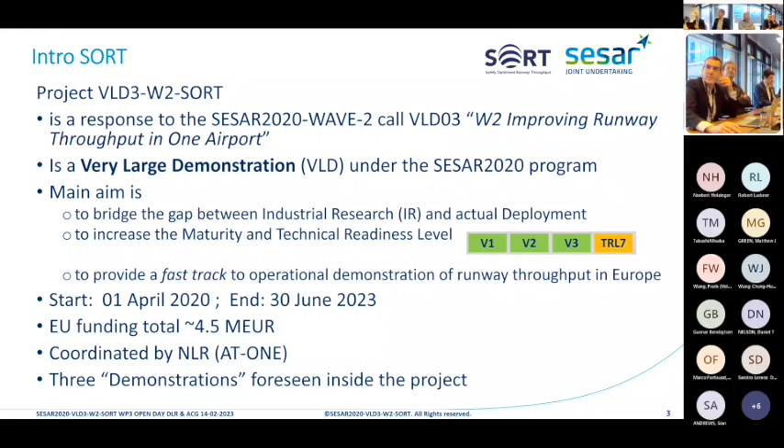So maybe if I can have the next slide, please. But before that, who are all inside the consortium? On the left side we see the kind of members. AT-One is a kind of partnership between Royal NLR and DLR as a research entity. NATMIG is the North European ATM industrial group, with many partners inside, amongst which SINTEF Norway is a member of this consortium. And COOPANS is a cooperation, a partnership of ANSPs — we're happy that Austro Control, also a member of COOPANS, is hosting this open day today for us, and also part of COOPANS in the project is LFV Sweden.

Of course, we know Eurocontrol, and they are part of this project as well, together with NATS of the UK, an air navigation service provider, who also has a linked third party coupled to their work, the company Leidos, who works on software implementation and product matters. And also another ANSP, Skyguide, is part of this project.

From the view of the SESAR European Airport Consortium, we have 3 airports available: Heathrow Airport, Arlanda Airport as a member of Swedavia, and Zurich Airport. So those are the partners, and I will now touch upon the 3 demos in the project at a high level.

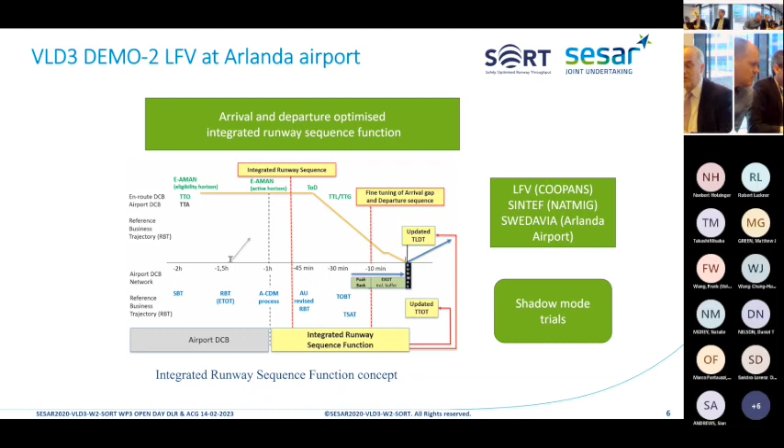Now, I hope you will learn a lot from it today, and I won't say more about it, so as not to waste the presentations of others by duplicating the text.

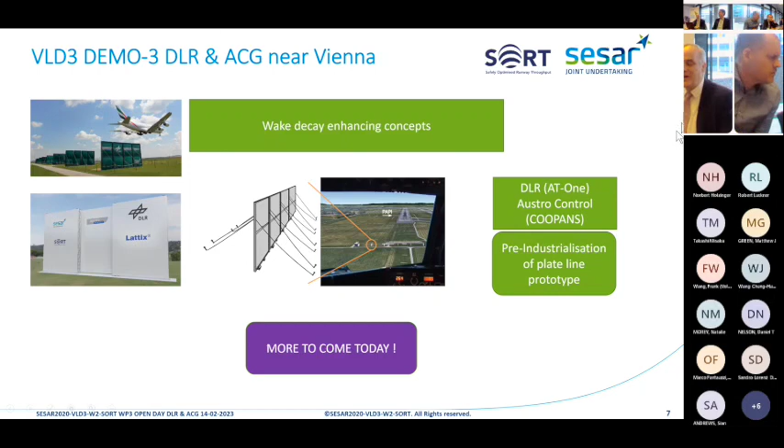Okay, I'm coming almost to conclusion. What is the project result? We have the demonstrations. We are in VLD, a very large demonstration type of project. So we made a demonstration plan. Unfortunately, it's still confidential, but maybe that changes in the future.

We worked on a lot of SESAR solutions that I'm not going to mention all here, but the specific demonstrations worked on particular SESAR solutions. And today we are here for the solution on the plate lines. The outcome of all the demonstrations will be reported in the demonstration report, which fortunately will be made public so you can all access that information after the project has closed.

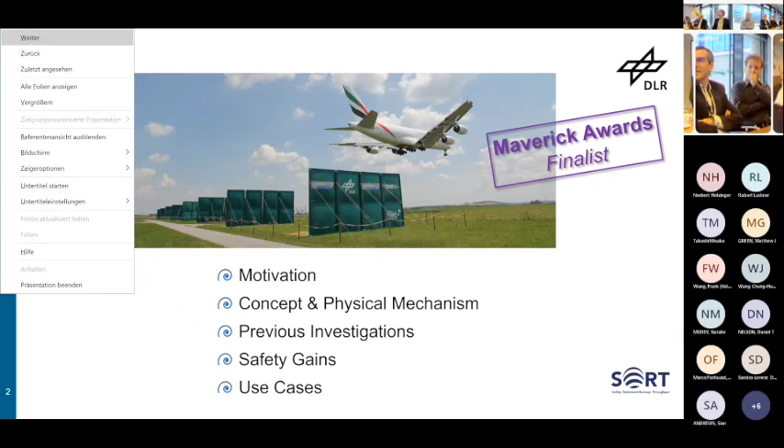Okay Frank, you will start with... If you don't need the mouse, I would be glad. Okay, thanks. Okay, I have to be careful.

Ladies and gentlemen here in the audience and on their screens, I want to warmly welcome you to my presentation entitled Plate Lines: Physical Mechanism, Previous Investigation and Safety Gains. I really appreciate that you took the time to travel to Vienna or to watch our presentation on screen, to see the achievements we could make in the last few years on the plate line principle.

So this is the outline of my talk. First I would like to motivate why we are interested in mitigating wake vortex encounter risks in that particular phase of flight, final approach and touchdown. Why is that the most important part?

Then I want to introduce the plate line concept, the underlying physical mechanism, briefly recapitulate previous investigations, and then come to the safety gains. These safety gains were estimated from data we collected during a measurement campaign here at Vienna Airport in 2019, which is where this photo was taken.

At that time, we installed two temporary plate lines that had to be removed after the experiment. These plate lines consisted of wooden frames covered by truck tarpaulin and could be folded up and down, held by ropes. So a simple solution just for that campaign.

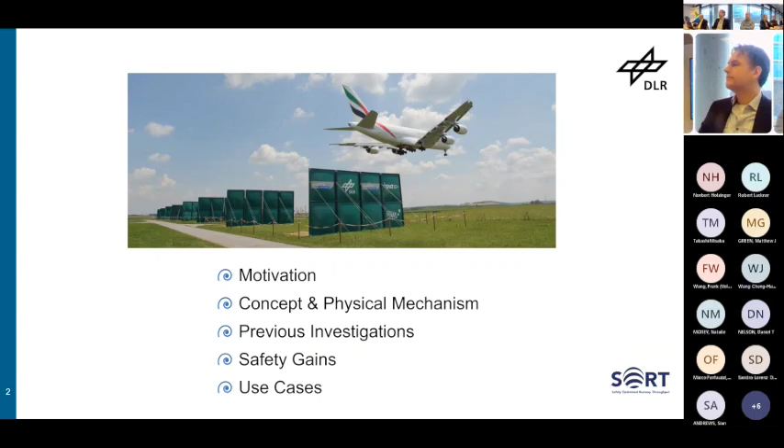I also don't want to conceal that we were lucky to win two awards. For the Maverick Awards, we were at least finalists, and for the ATM Awards, we ended up in 2nd place.

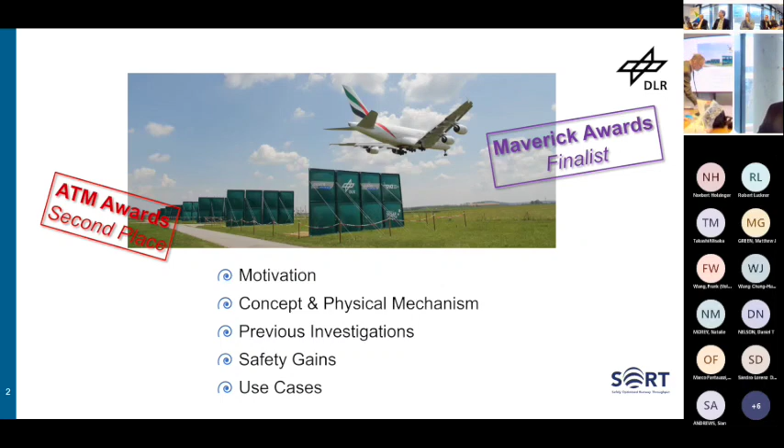So here's the motivation. I guess all of you are well aware that long-lived counter-rotating vortices are formed behind aircraft, and that these vortices pose a potential threat to the safety of following air traffic, and also limit the runway throughput capacity of major airports.

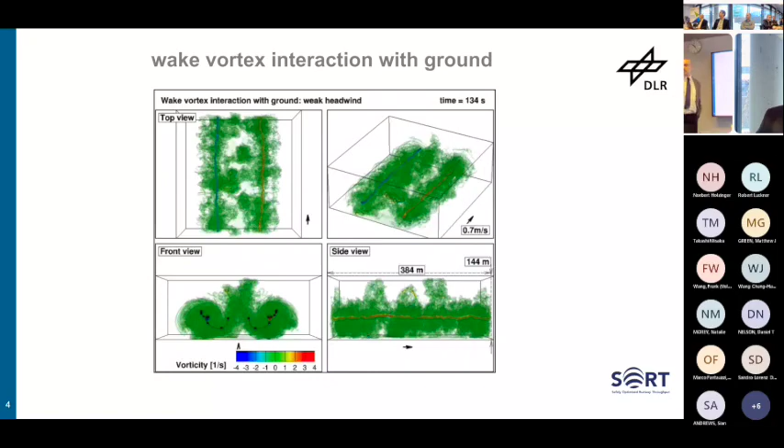Along the glide slope, vortices always induce each other at descent speed, so they can descend below the flight corridor. Crosswind will affect the vortices laterally. There are a few atmospheric situations where this descent speed is impeded, for example thermally stable stratification, updrafts of convection, or crosswind shear. But all these phenomena also reduce the lifetime of vortices.

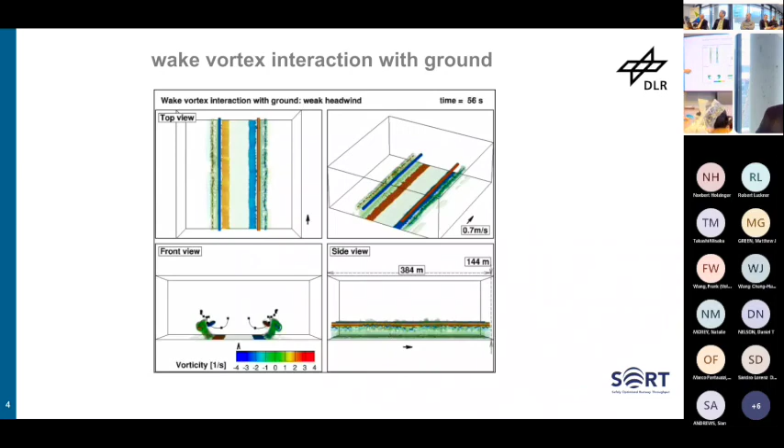This is very different near the ground. Here you see a large eddy simulation, different perspectives of vortex behavior where the background turbulence is contributed by a weak headwind. Below left, you see the vortex trajectories best. So when vortices approach the ground, they can't continue descending, but first diverge and then rebound. This divergence and rebound, and also the decay, is related to the formation of secondary vorticity on the ground that then detaches. Secondary vortices rotate around the primary vortices, leading to the rebound and the decay.

Below you see trajectories for different crosswind strengths, on top for the windward vortex, below for the lee vortex. Here the red curve is the critical situation, for a crosswind on the order of 1 meter per second, a little less. The vortex descends, rebounds, and then passes really the runway center line at a flight altitude where the next aircraft may pass.

So this is also something which is not new, this is known in the wake vortex community. When wake vortex separations were determined for the A380, still all phases of flight were considered and measurements were done. But already for the B747-8, they very much focused on a flight altitude like this, 60 meters above ground. And also the recategorization initiative initiated by ICAO, first implemented in USA and Europe, focused very much on vortex evolution in ground proximity. So here we really have the bottleneck of the whole flight.

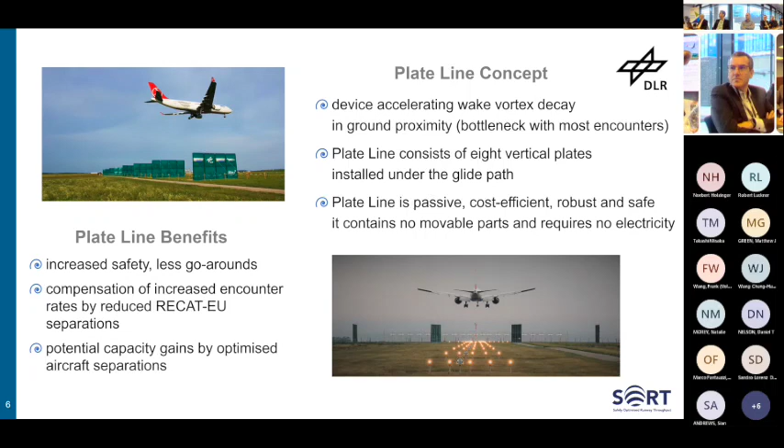So what's the physical mechanism behind the plates? Here again, results of numerical simulations. If the main vortex here on the left approaches the ground, it induces a secondary vortex at the ground. But if we have a plate, it very early triggers what we call an omega-shaped secondary vortex. This is like a ring vortex, and it actively induces itself a velocity towards the main vortex, like a smoke ring of a smoker.

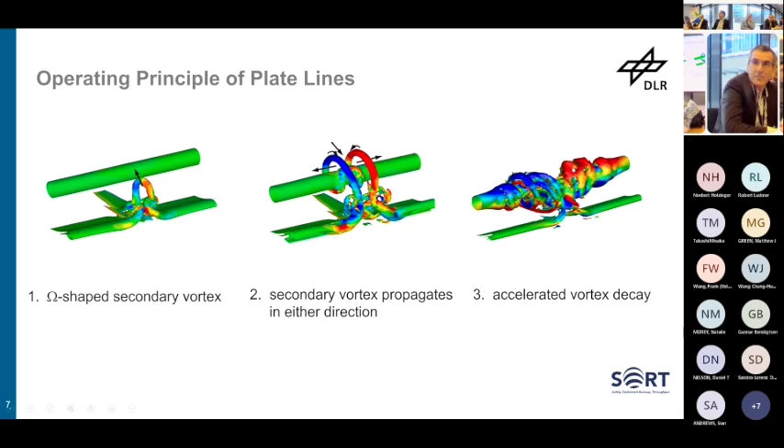The main vortex, with this rotation, will wrap the secondary vortex around the primary vortex, and then we have 2 spiral-shaped rings that again induce in themselves a propagation speed in both directions. The disturbances propagate along the vortices and accelerate vortex decay in situations where no external effects like turbulence do the job.

So these are investigations that we did over the years since the idea of the plates came up in 2008. They have been further developed and validated, and we started with towing tank experiments shown by the video on top. I see the animations are a little bit demanding, I hope you can see something on your screens. On top, we have a water tank, a small aircraft model is towed through the tank, and the vortices are visualized by dye.

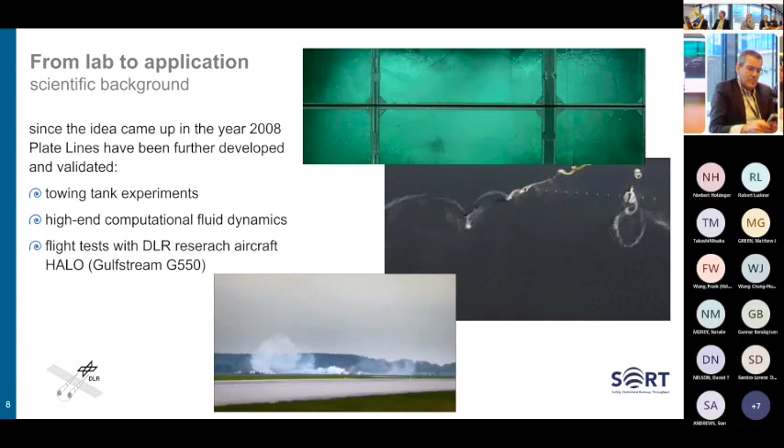We have here on the right an obstacle, I hope you can see it, another one here. But you can certainly see that when the vortices approach this obstacle, disturbances are traveling in both directions. Then we did a large number of high-end computational fluid dynamics simulations.

The example is shown here in the middle. This is a so-called hybrid simulation where we simulate the detailed flow around an A340 aircraft in high lift configuration with individual flaps and everything, so the vortex roll-up is really considered in detail. This is a final approach in landing, flying over the plates. Such simulations were used to optimize the shape, dimensions of the plates, their separation, and also the robustness against wind and turbulence, but also for the effects for aircraft of different sizes.

Then the year 2013 saw the first real flight research experiments at DLR premises in Oberpfaffenhofen, where the DLR research aircraft Halo, a Gulfstream G550, produced the vortices. The vortices were made visible by red smoke and fog. I hope you can see a little bit, the animation is not running smoothly, but you have to imagine that this aircraft has a wingspan of the order of 30 meters.

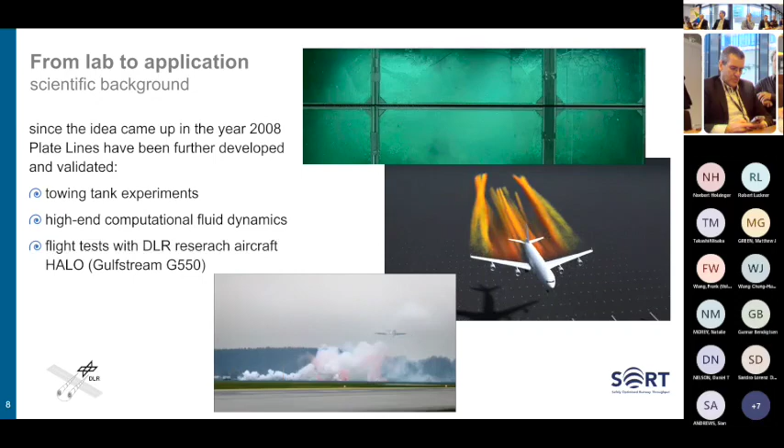And later on, you can see people here, I don't know whether you can see them, but the sheer size of these vortices of a not so big aircraft really make clear that if a big aircraft generates these usually invisible vortices, they can pose a problem for follower aircraft.

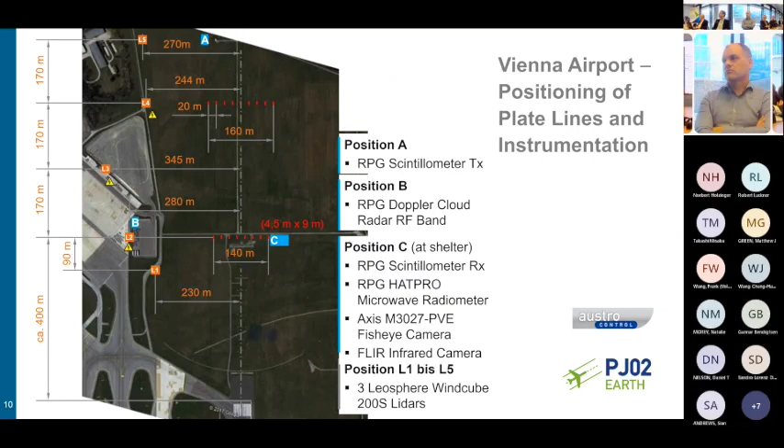And we had a number of other meteorological information that I don't explain in detail now.

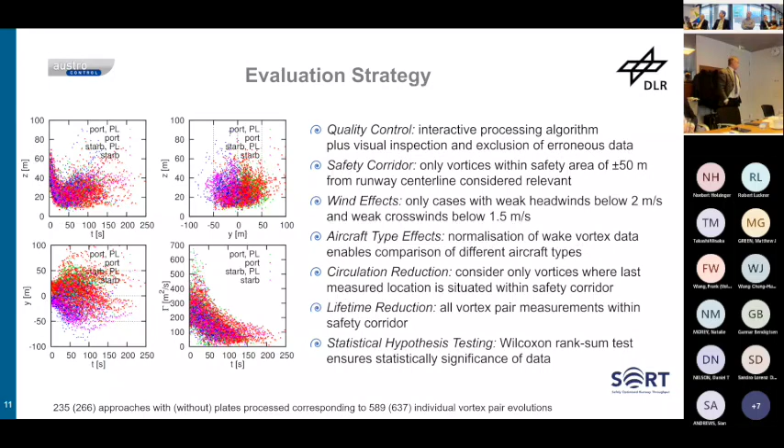So what we got, we collected like 9,000 approaches, but from those we could evaluate only a relatively small part. The numbers are shown below, like 250 approaches with and without plate lines respectively, that correspond to roughly 600 individual vortex pair evolutions with and without plates each. You end up with such scatter plots - vertical position against time, vortex evolution in space, and circulation decay, that's the strength of the vortices. With plates, we have red and blue dots, without plates, green and magenta. Obviously you don't see so much because there's a manifold of wake vortex behavior.

You can, in the decay, see the blue and red vortices live shorter than the others. But we really had to develop an evaluation strategy to find numbers that really describe what's happening. I want to go through these. They were intended to have good quality and also to make sure that the data is statistically significant.

First of all, for processing of the LiDAR data, we used an interactive processing algorithm, which also is time consuming, delivers very good quality, but means that the number of measurements that we could process is limited. And then we inspected all the measurements and excluded obviously erroneous data.

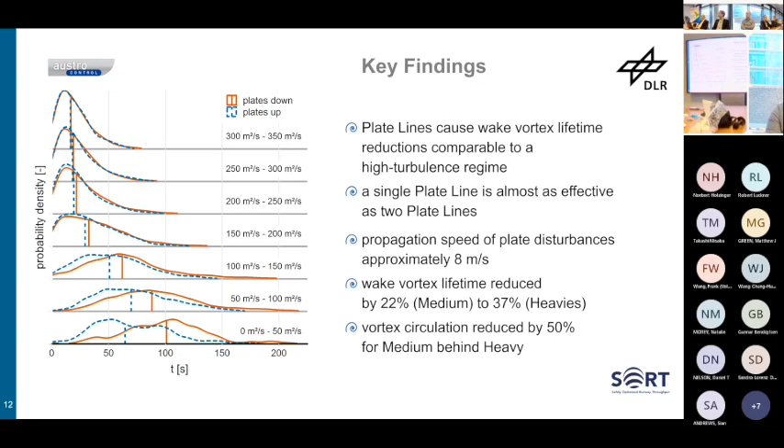So this brings me to the use cases, and the use cases we envisage are all combinations with existing or future separation schemes. You may not be aware of all of them, so I want to briefly introduce these separation schemes first.

RECAT EU optimizes the minimum wake vortex separations by classifying aircraft types into 6 categories, not based on the maximum takeoff weight like the ICAO scheme, but based on a selection of relevant aircraft parameters. That's RECAT phase 1. RECAT phase 2 extends the scheme to individual pairings.

PWS stands for piecewise separations of leading and following aircraft.

REDSEP is a scheme that was also developed here in Vienna, and it allows the delivery of applicable separations between medium-medium pairings and medium-heavy pairings, not only at the threshold, but already at 1.5 nautical miles from runway threshold, under IMC - instrument meteorological conditions. Under VMC they do that anyway, but under specified wind conditions, only for a certain amount of headwind. We talked about headwind before.

And then finally, dynamic pairwise separations, also known as RECAT stage 3, allows the reduction of aircraft separations depending on the prevailing weather conditions and the resulting wake vortex behavior. For this, you need a wake vortex advisory system, like the system that DLR developed, that monitors and predicts weather conditions and the resulting vortex behavior and translates those into separations.

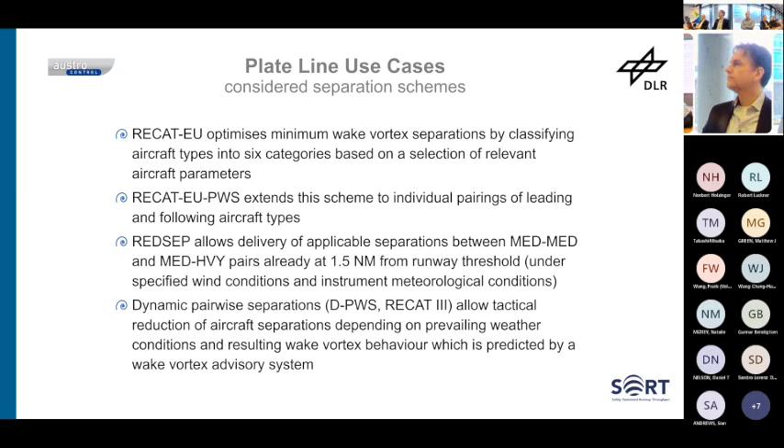If you want to see potential capacity throughput gains, you can combine it with RECAT EU or RECAT EU pairwise separations, just the schemes. RECAT EU is already operating for several years at several European airports: Toulouse, Paris, London Heathrow, Leipzig, Halle. Pairwise separations will probably be released by EASA this year, and London Heathrow plans to install it first.

In the safety case, I said that before - the principle is to avoid strong encounters, but as you reduce separations, the number of encounters is increasing. For pairwise separation, the guess or estimate is this could be 60%. And we think this may limit the acceptance.

And if you combine the introduction of pairwise separation with the plate lines, you would have both benefits - substantial capacity gains and safety gains at the same time.

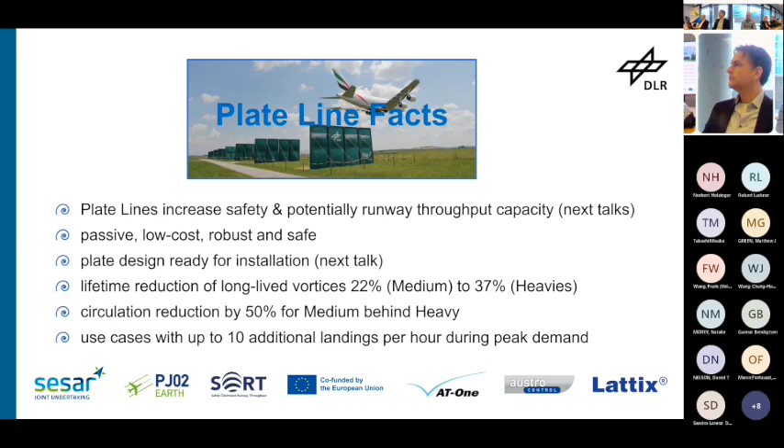So this was obviously not really the latest version, because I also wanted to show you the number of scientific publications that would be available for interested readers, and also the patents. The method is patented in a few countries. But here I, of course, also have to thank not only the team and you, but also the funding from SESAR, the SORT project, and PJ02 before.

It was quite an endeavor. Christian Kern mentioned a few things already, and in between we really had to be a little tough to get where we are today. But we're all happy, and we made friends and made a team. And maybe in the future we will all also make more capacity. I mean, that's the goal and the big wish.

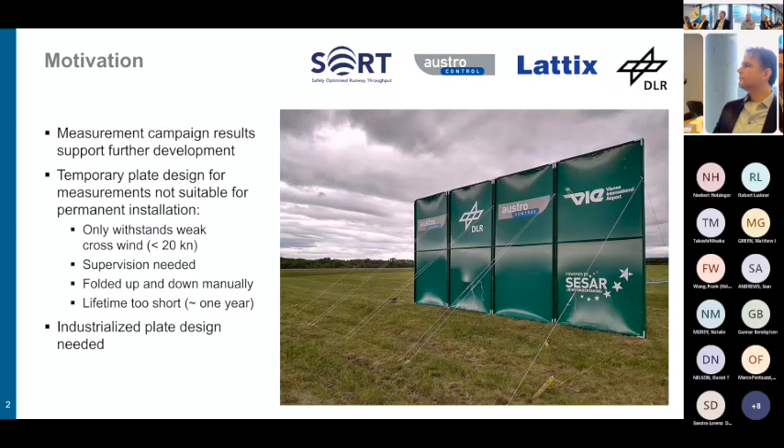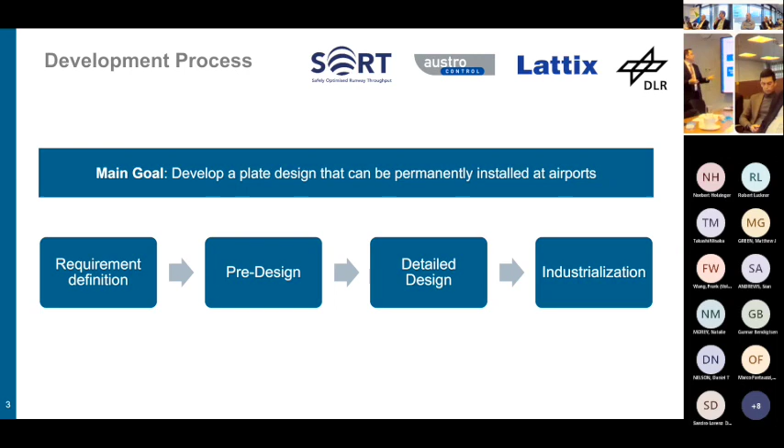And I think my main message today, what I'd like to get across, is that we really looked in detail at all the requirements and all the design options that we have, and we have a product today that you can really trust to be at an airport. And I will go just through all these steps in my talk, so you can actually see what we did and how we progressed.

So we started actually with the requirements definition, and here we wanted to really have all the necessary requirements that an airport could have for such a plate line. And that's why we collected from different experts, mainly our partners in Austro Control, but also our own experts. We collected all possible requirements that we could think of and that seemed sensible in a requirements list.

And then this was actually, as Wilfred has described, this was in April 2020. So we made our first experience with online meetings. We met for an online workshop during the start of the pandemic. And we grouped all the requirements that we had collected into these 8 main categories. And then everybody who participated in the workshop had the possibility to vote on the importance of this category, so that in the end we came up with an expert score on how important each category for the design would be.

Just to give you an example, when we say the category effort, it contains on the one hand the effort to actually manufacture and install the plate line, but on the other hand also the effort for maintenance and for mowing the lawn around the plate line.

So we actually looked at all the details, and the two most important ones I'd like to show you in detail.

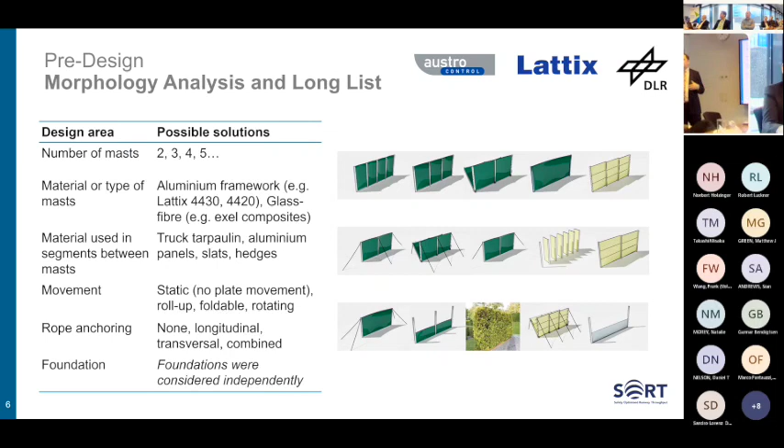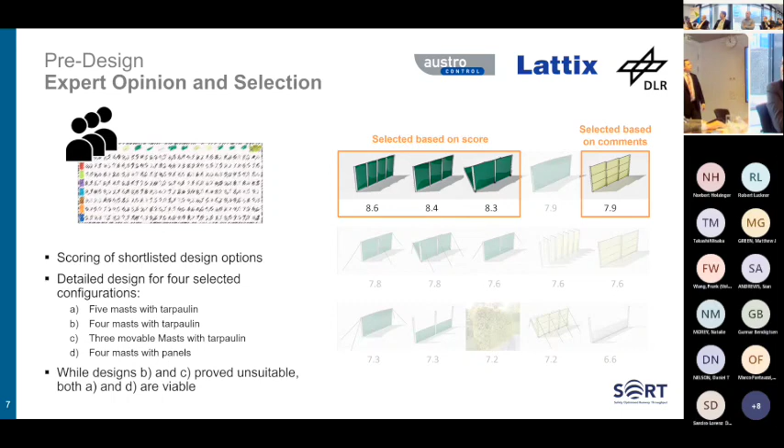To decide which one of these is best, we couldn't develop all of them in great detail. So we again held an expert workshop with the possibility to rate each design. Each expert rated each design according to the design criteria we had defined before. That way we came up with a score for each design option, and we were able to select the most successful ones for further development.

Now I could go through each of them and show you in detail what we did, but to spare you some time, I'll show you at least two. We actually did a detailed analysis and saw that, yeah, this will probably not work.

On the one hand, it's because of low stability—with only 4 masts we were not able to make the tarpaulin solution work. On the other hand, we also had a movable design, which we already suspected could be too complex. It turned out that yes, from the engineering point of view, it is a very interesting and very good solution.

But if you look at the complexity of installing it at an airport, making it frangible, and making it work all the time, it was just too much. So we said okay, this will not work in practice.

Something we actually learned along the way for the plate design is that the big advantage of the plate lines is that they are very simple and passive, and they don't really have much complexity—and that's what actually makes them possible to do.

So if you start with a high complexity solution, this wouldn't have worked.

I have been talking a lot about the masts and also about the panels, and I would like to show you some of the design solutions or design elements we used. On the one hand, you have these Lattix masts, which you can see here. These are actually frangible masts with frangibility certification, already used throughout the world at different airports, for example for ILS, but also for other applications. They are certified for frangibility and ILS conformity, and Lattix also have a lot of experience working on specialized solutions, not only standard masts but also more complicated and specialized configurations.

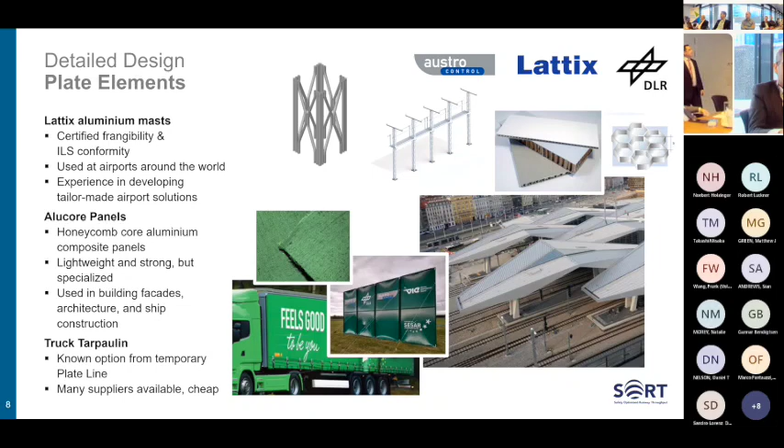Going into the detailed design, I showed you that we selected two designs we wanted to develop in detail. Here you can see one of them. This is the 5 masts from Lattix that I just showed you, with the truck tarpaulin in between.

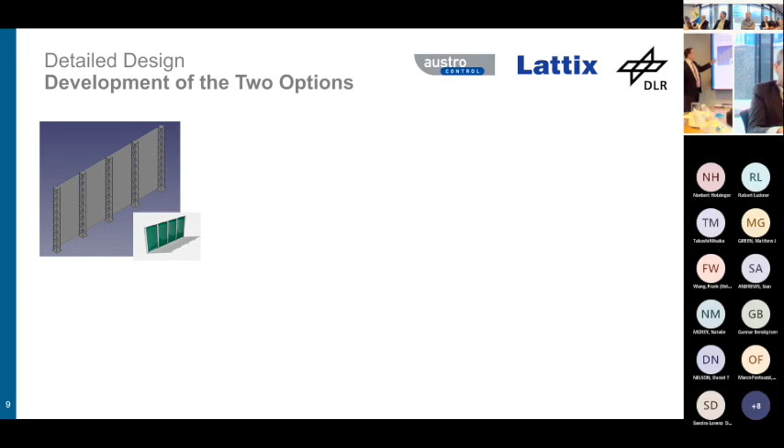We developed this kind of connector, which can be connected to the mast. You can see it a little bit here on this picture. In the center, this connector is then connected through turnbuckles to the truck tarpaulin. You can use the turnbuckles to ensure the truck tarpaulin is actually stretched even when there is no wind. So this was one solution.

And the second solution used just 4 masts, but with panels. You can see the CAD drawing of this here. So it's similar, but instead of the truck tarpaulin, and instead of 5 masts, it uses 4, and instead of the truck tarpaulin, we used these honeycomb core panels. One detail: you can also see the panels are on different sides of the masts.

We also developed a very similar connector, which is connected to the mast. The panels on the back side have these kinds of hooks, and these hooks can hook into the connector, as animated here. I think that is more or less clear to see.

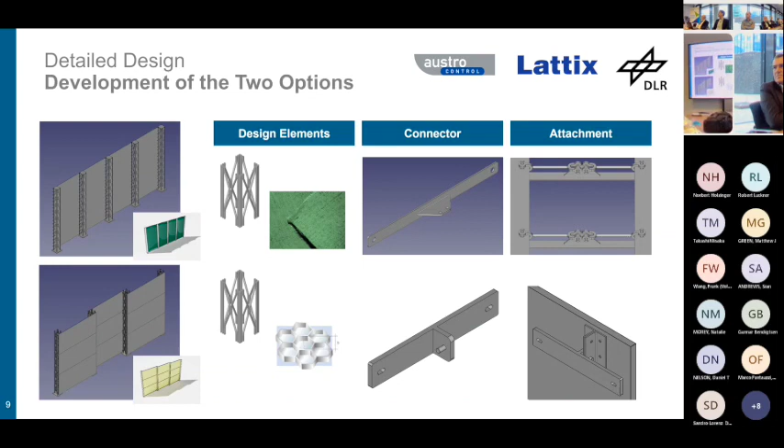Then with these two designs, we looked at a finite element model. With this model, we could analyze internal stresses, displacements, and do a very detailed analysis of all the stresses in the masts, the tarpaulin, and the panels. We saw that for the 5 masts with the tarpaulin solution, there is a safety factor of 1.5. The safety factor is what stresses we actually see during the maximum loads, and how far away this is from the allowable stress. So a safety factor of 1.5 basically means the stress could rise by a factor of 1.5 and the material would still hold.

So this was okay from an engineering point of view, but we would have liked a higher safety factor for our installation. We did the same analysis for the panel solution, and here we have a higher safety factor.

But of course, the question of frangibility was one issue we had to tackle, because with the truck tarpaulin and the certified frangible masts, it's clear that frangibility is ensured. But with the panels, we need to make sure the panels don't make the masts more sturdy and don't affect their ability to be frangible. Based on this, and also the frangibility concept I'll show you on the next slide, we said okay, this is the solution we will go with because it has a higher safety factor.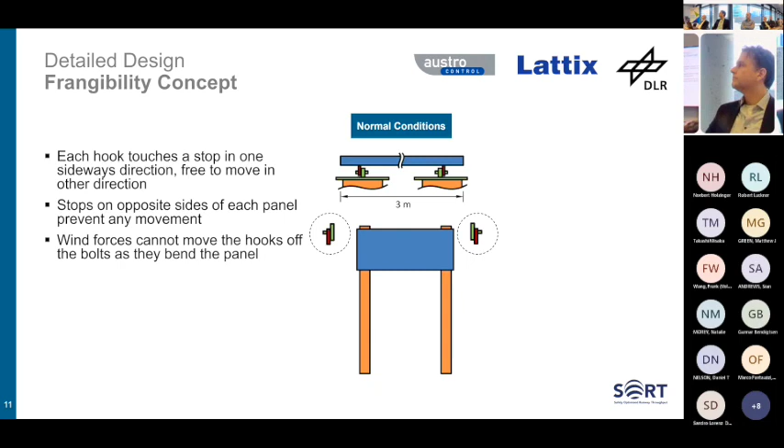In combination, this means that during normal operation, the panel cannot go anywhere. It cannot move to the left, it cannot move to the right. And that's the normal operation. Also the wind can only bend the panel, but it cannot change the distance between the two masts. So that means it will work also during normal operations.

But then in the frangibility case, where you have an aircraft actually hitting the plate line, what happens is that the mast is frangible, so it starts moving. And that way, the distance between the two masts is getting lower, and the hook on the other side of the impacting aircraft is actually falling off of the bolt. And that means that basically the panel will just fall off and will not affect the frangibility of the masts.

This is more or less understandable. And of course, another important factor is that the panels themselves are lightweight, so it's easy for the aircraft to move the panel away.

Okay, and with that, we also looked at using FEM on all the details. So we looked at different wind directions. We made sure that the panel can actually take these loads, that all the masts can take the wind loads for both wind directions.

We also looked at just the connector. We looked at the hooks. We also made sure that high wind loads are not able to lift the panel off the hooks. And we saw that this is not happening under high wind loads, but still we added a redundant holder at the top of the mast, which holds down the panel, the top panel, and then the top panel holds down the lower panels.

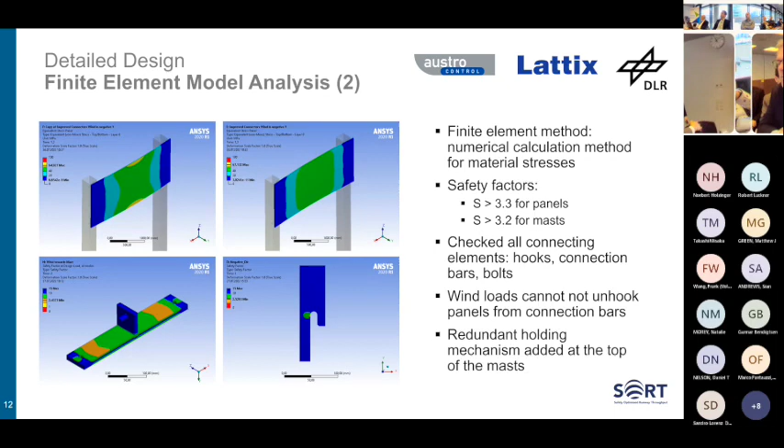And that means that this has a double insurance that the panels will not go off the hooks. We were very happy because now we have really a working solution that we can use. And so, as you can see, we produced drawings and CAD models for all of this.

So we have 4 Lattix aluminum masts in the final design with 9 alucore panels. The panels are attached to the masts by this hook solution that I presented to you. And then, on the inner side of these 2 inner masts, you have this kind of cover panels, which prevent the wind from going through the plate.

We produced CAD models for all the parts, assembly drawings, production drawings. We have a list of all the parts that need to be produced. We have an assembly instruction for the whole structure. And we have a detailed technical documentation which also includes all the calculations that you need and all the design details, and also the history of how we got there.

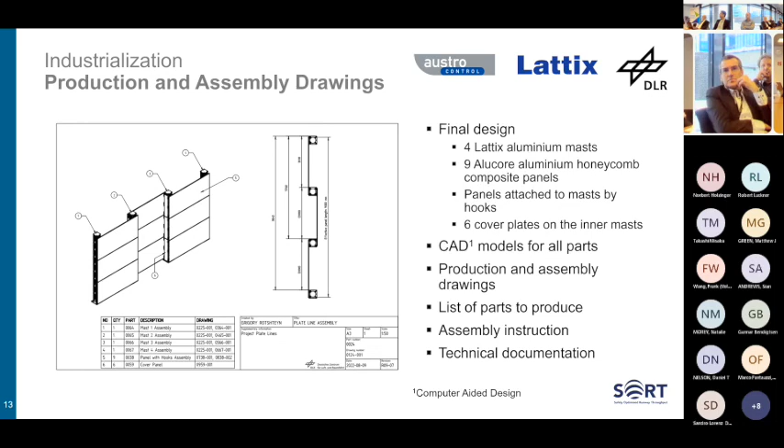Just to have an impression, here you have the drawings of the assembly of one panel. You can see here the hooks on the back side of the panel that will be used to attach it to the mast. And on the other side, you have the mast where you can see the attachment bars, and they are also at defined heights. You also have drawings with details on how to attach the attachment bars.

Okay, so with this, I just want to also talk a little bit about the foundation. We actually developed two different solutions for the foundation, but the solution that you see here in Vienna at Rauchenwarth is where we opted for one single foundation, which was filled on site, and we used the foundation kit for the mast, which was developed by Lattix.

The foundation kit consists of 4 rods that are inserted in the foundation when it is created, and then the mast is screwed onto these 4 rods. They go very deep, so this can actually take all the wind loads that are needed.

One thing that may also be interesting and important is that if you have grass next to the plate, the mower for the grass can actually go over this, and you don't have to manually trim the grass close to the plate. So that's also something useful in practice.

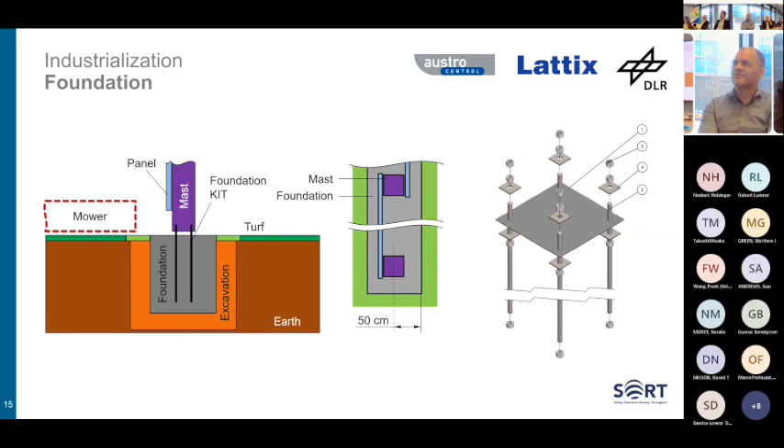Going forward, we had an expert review process of all the calculations that we made, by Mr. Gruszkiewicz, who is not here today but will join us later, on site. He looked at all the designs and calculations we made, and made some suggestions and clarifications that he needed for us to adapt the design.

What I showed was already with these adaptations, but I want to emphasize one thing: a small change to the connectors. As you can see, we had a small step here at the connectors, which was meant to transfer the force between the panel and the mast. Based on recommendations from the review, we removed this step, and now the force transfer happens by friction.

This allows us during assembly to move this connection part to the left and to the right, which helps counteract any tolerances that you have during assembly. So that really helps the design, and also helps the foundation not require as high a tolerance as it otherwise would.

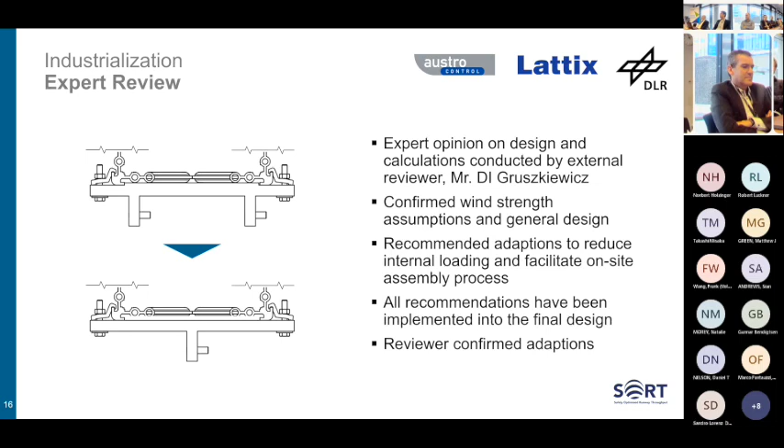We implemented all the recommendations by the reviewer, and also had a second, short review of the implementation, where we got the okay from the reviewer, who said yes, you implemented everything I wanted correctly. So that was the next step, and then just a few images that Alexander Flo made during the construction.

The plate line was delivered as a kit by Lattix, led by Gunnar Bendingsen. So thanks Gunnar a lot for this. Not only was the plate delivered by Lattix, but they also did a lot during the design process and really helped us. This was a really big help for us to achieve the goals here. So thank you, Gunnar.

We also worked very closely, not only during construction but throughout the whole project, always in cooperation with Austro Control. I'd like to point out that Alexander Flo and Johannes Schwarzenbacher have really done a lot to support this project, bring it forward, and organize the construction of the plate lines and the foundation.

The construction went surprisingly smoothly for me. I was a little nervous when this happened, and Frank and myself actually booked a flight to the construction. When we arrived, everything was already done in one day, much faster than we expected. We were very happy, of course, that this went so smoothly, but on the other hand, we missed all the action. So I want to say thank you to Johannes and Alex for doing this.

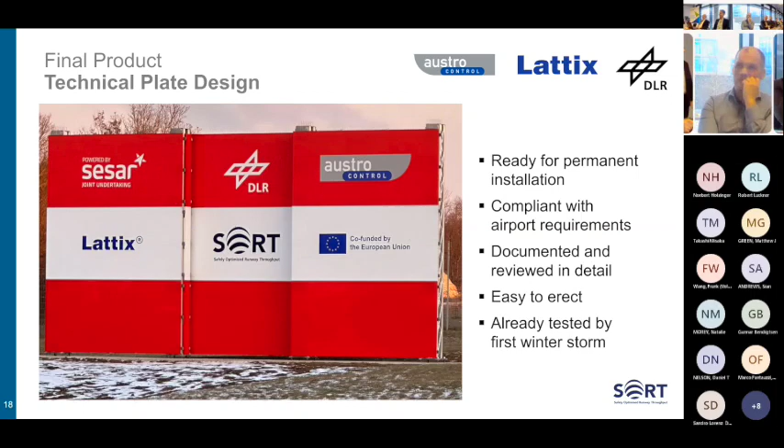With that, I say thank you for your attention, and I'm happy to answer any questions you might have. Thank you.

Just one question: how deep did you have to go into the soil for the foundation? Do you know more than that? It's 1 meter, 1.4 I think.

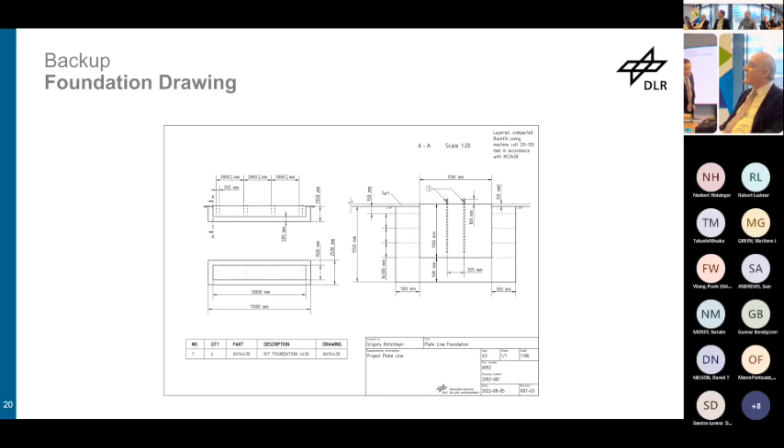Is that really necessary, or is it kind of a minimum, or is it a safety kind of thing? 1.1, yeah, 1.1, I have it as a backup. So it's 1.1 meters deep, and yes, it's proven necessary because it was part of the review. We actually designed it even a little bit less, and it was adapted by the reviewer. So I think today it's as small as it can be.

But we also learned that prefab foundations may be simpler. You can also buy prefab, and that would make it probably faster and definitely much cheaper. And they are also smaller.

Sufficient, thank you. But you know, when experts come, they want to be on the safe side, things keep growing, that's why I asked. Yeah, it's a safety margin. There's of course a safety margin inside, so you can be sure that nothing will happen to this foundation.

What were the design wind limits for the panels? They're designed to withstand winds up to what? Well, they are designed to withstand winds basically according to the same Eurocode standard that we also use for the whole plate.

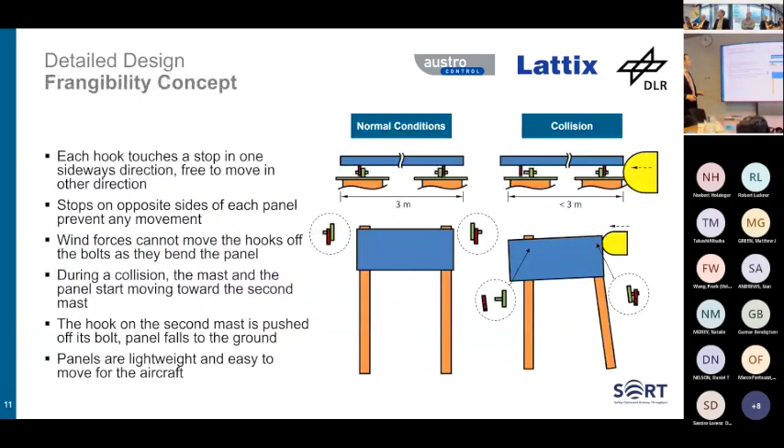I didn't really mention it, I just showed it briefly. So, sorry, just go back. So this is a European wind standard, and I wrote down that the base wind speed is about 100 kilometers per hour, and gusts are up to 180. But this is not really precise because it's a more detailed process. You cannot really say it's just one wind speed and that's it, because it has to account for gusts, it has to account for aerodynamics of the plate, it has to account for the area where it is situated. So this is just a rough estimate of what it comes down to, but in detail you go through the norm.

And during the storm, we had 60 kilometers per hour wind and gusts between 90 and 100 kilometers per hour, and it's still there. And the masts are designed for wind speeds up to, what is it, like 62 meters per second. That's like the force of a jet blast, right? Yeah.

Maybe a reaction to that: because if you have these strong winds or gusts, in fact the effect on the decay plate is maybe less of interest, because anyway you have the wind effect on the decay. So in that case, maybe you can consider having something foldable. Something foldable, basically, yes, we actually considered that.

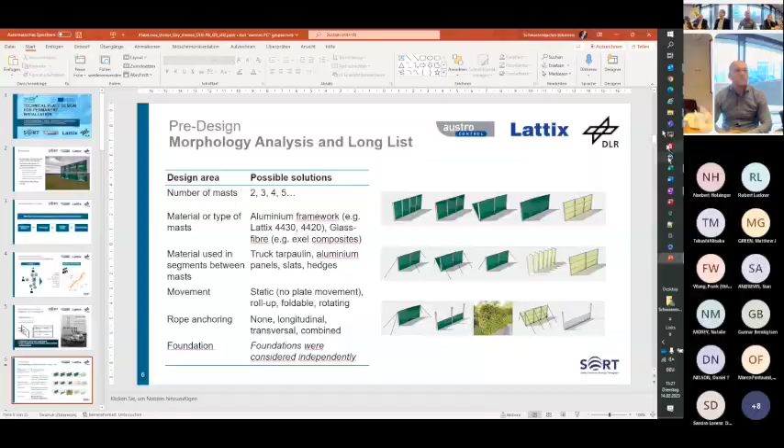Now Andrei Koloshin will talk about use case 3 and the potential capacity gains that we estimated. I think this is the Outlook presentation, the LRFT presentation. This one, okay. Thank you.

Thank you. My name is Andrei Koloshin. I've done this work mostly together with Dennis Vechtel. We both work at the DLR Institute of Flight Systems located in Braunschweig, Germany.

I want to talk about the potential runway throughput increase.

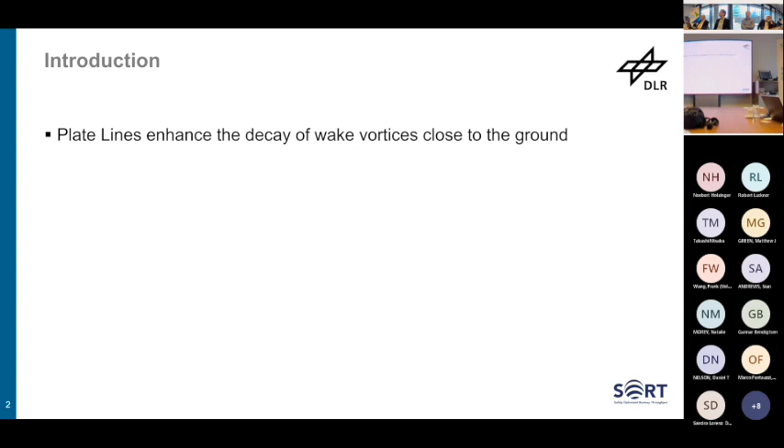We've seen in the previous presentations already that plate lines are a method to enhance the decay of wake vortices close to the ground. I want to talk about the benefits that we might actually gain from that in more detail. We've already seen one possible benefit is a safety gain if the plate lines are used for the mitigation of the severity of a possible wake encounter.

Alternatively, if we maintain the same level of safety, we can also achieve a capacity gain by reducing the aircraft separation. And I will show some numbers about the possible benefits that we, at least for the moment, consider to be achievable with this concept.

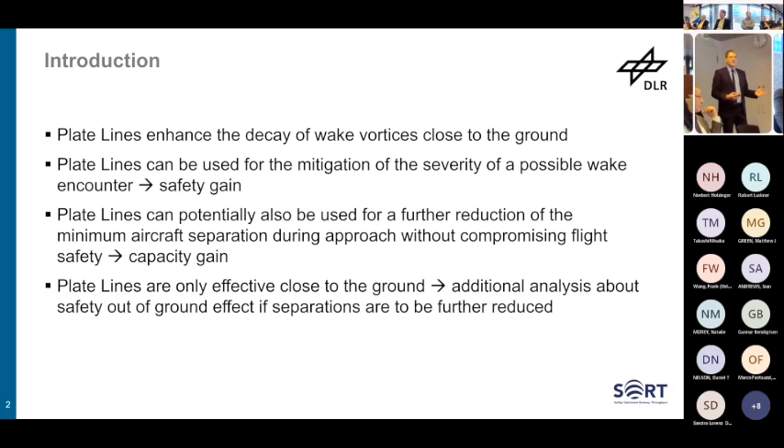One very important question that's always asked during this discussion: the plate lines are only effective close to the ground, but what about the out-of-ground effect? If we are further up on the glide path, the plates are not effective there. What if we are reducing the separations not only in ground effect, but then of course also up on the glide path? What's happening up there? I will address this in detail.

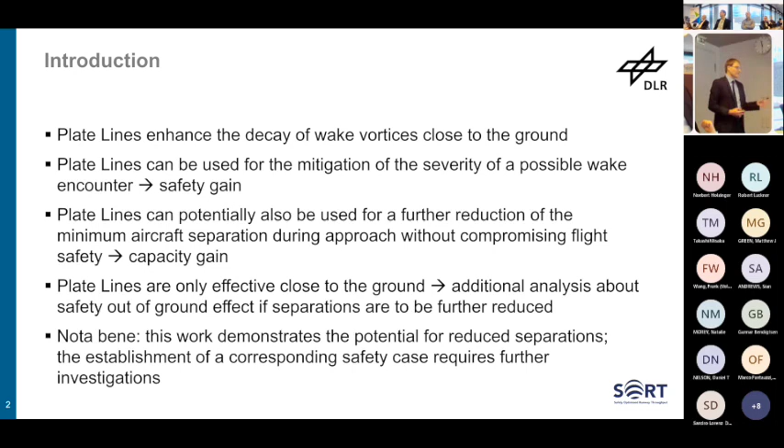One important remark, sort of a disclaimer if you want to call it that way: we are looking at this from a scientist's perspective. We'll do some calculations, present some numbers, but for establishing a corresponding safety case, further investigations are required. That's something we should all keep in mind during this.

We have seen this slide before, so I don't want to jump too much into detail. Frank showed it already, but just as a short recap: we can either increase safety by using plate lines for faster wake vortex decay while maintaining the same capacity level, or we can maintain the same safety level and increase capacity, or do a combination of both somewhere in between. Mostly here we are focusing on using RECAT-EU and RECAT-EU pairwise separations as a reference, so we are somewhat in that area.

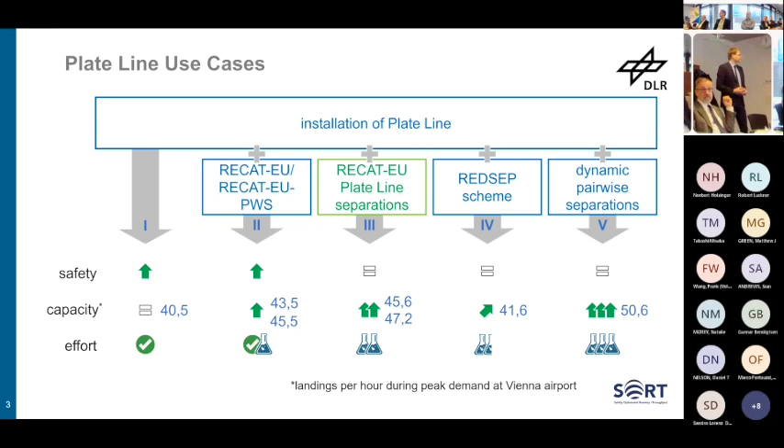So I want to show the method that we used here in more detail. Generally, we followed the RECAT-EU and RECAT-EU pairwise safety case as close as possible. We did some slight modifications, which I will go into in detail, but basically we followed these safety cases.

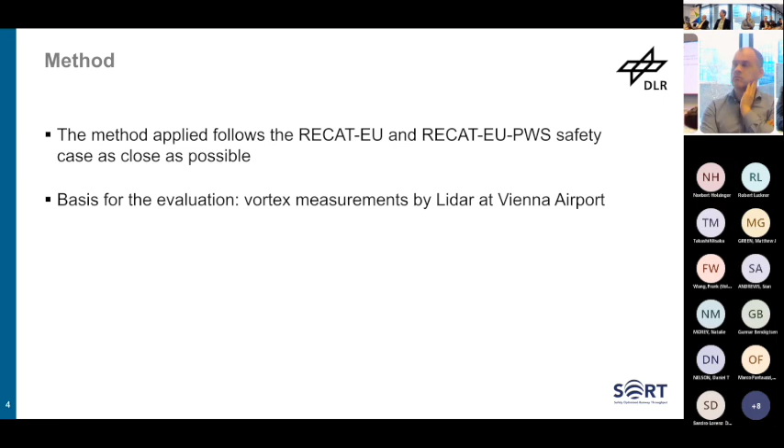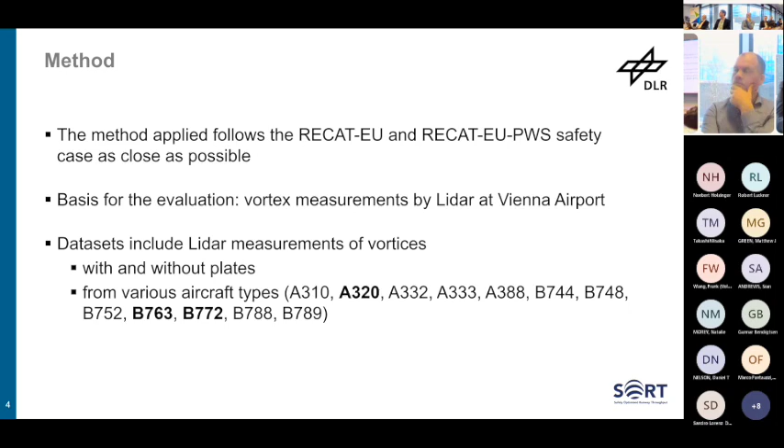The evaluation basis were vortex measurements by LiDAR at Vienna Airport. Frank has already shown a lot of these measurement results. The datasets included measurements of vortices with and without plates for a variety of different aircraft types, mostly Airbus A320, Boeing 763 and Boeing 772, but also a number of other aircraft types.

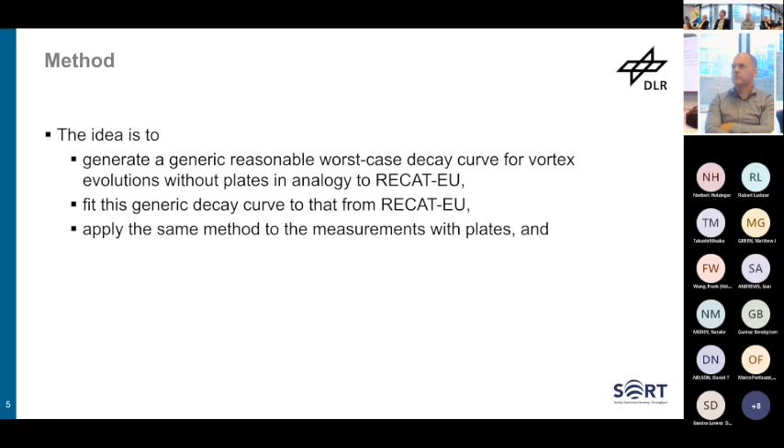The basic idea here for the in-ground effect calculation is to generate a generic decay curve for the reasonable worst case scenario for the vortex evolutions without plates at first, in analogy to RECAT-EU, and then fit this generic decay curve to the RECAT-EU curve. We then also apply the same method to the measurements with plates so that we can combine these two decay curves. When combining these curves, we see there's some kind of time difference between those, and we can transfer this timing difference to the aircraft separation difference just by using the airspeed of the aircraft.

I want to show some plots on this. So we are generating the generic reasonable worst case decay curve following this approach. On the left-hand side, we can see some measurements. Frank already showed quite a lot of data has been gathered; here's just some example data from these LiDAR measurements. Here's plotted the circulation over the time span, or the vortex age in this case. We see that we can fit that with a two-phase model with a slow decay at the start, and at a certain time a rapid decay follows. That's what we typically see in most of this data.

From all these measurements, Frank already said quite a lot of data has been gathered. We have calculated a median decay curve for all vortices that live at least 5 times our reference time. Here we are in dimensionless form for this generic curve, but we will see data with dimensions included again in the next slides. So we excluded the short-lived vortices here because very short-lived vortices are not relevant anymore anyway.

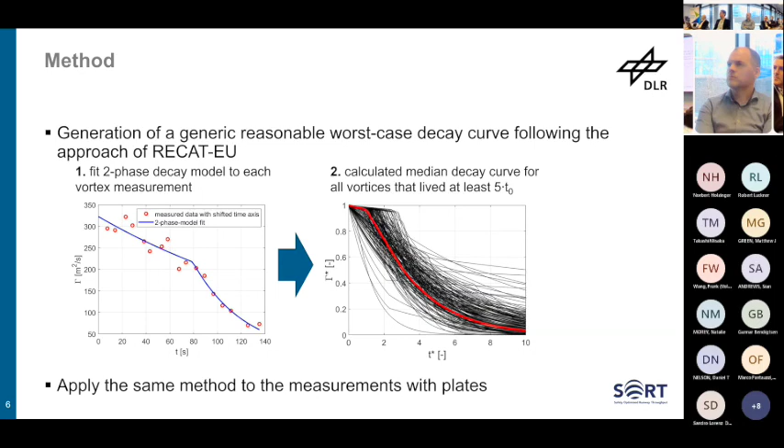And of course, we applied the same method to the measurements with plates so that we can compare these two. And that's what we see on the next slide. Firstly, we see that this generic reasonable worst case decay curve from our measurements fits quite well to that from the RECAT-EU safety case.

So that's our curve without plates. And if we compare to the decay curve when we have plates active, or passive, but standing up there, we see that the wake vortex decay is enhanced. So the decay is a little bit faster, the circulation goes down faster. And we can transform that into a difference of time.

Here we are still on the dimensionless scale. It's our delta t star in that case, the time difference. And what we can already see here is if we have a look at the delta t at different points in time: if we start here, we have only a small time difference at a small vortex age. And if we move further to the right-hand side for higher vortex age, we see a higher timing difference if we want to maintain the same circulation level.

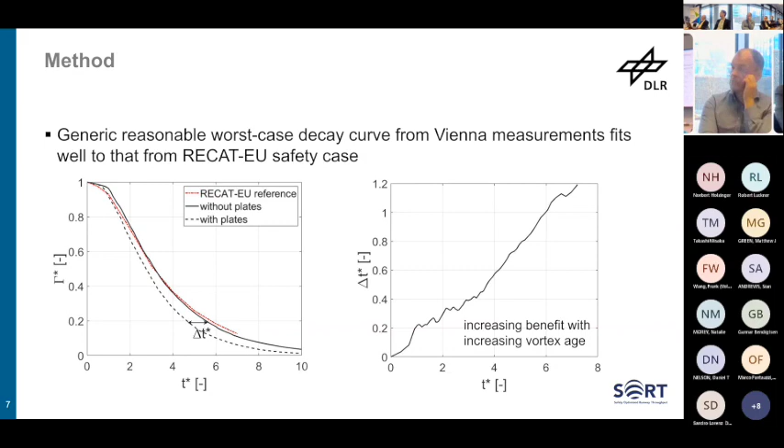And we can see it also in more detail on the right-hand side here. So at the start, we have no difference. And moving forward on our vortex age scale, we see an increase of the benefit of the time difference here. I want to give an example with detailed numbers, not in the dimensionless case, but now with proper dimensions.

So we have our two decay curves with and without plates. If we have a look at the RECAT-EU separation, in this example we have a Boeing 777 as the leader aircraft and an A320 as the follower aircraft. Then we can convert the separation from nautical miles to a time separation if we keep the airspeed in mind.

And we have a look at the circulation level that we normally would get without plates. Then we can check at what time do we get the same circulation level with plates. And that leads to our timing difference that we can convert back to a difference in separation, in nautical miles, by using the airspeed again. So that's a general method we have used to compare the measurements with plates and without plates.

If we do this for all the different aircraft categories, firstly for the in-ground effect analysis only, then we come up to these results.

We have been asked, why do we want the results up to 0.1 nautical miles? I want to address this question right away. Basically, often in many cases, especially for RECAT-EU pairwise, the rounding has been done to 0.5 nautical miles. And if asking air traffic controllers, they typically say when using only conventional air traffic control methodology without any kind of assistance system, 0.5 nautical miles is a typical precision that seems reasonable. For a safety case that might make sense, but our perspective here is a scientist's perspective. So we want to take a look at the numbers, and we decided not to round these numbers at all when storing them in our calculation.

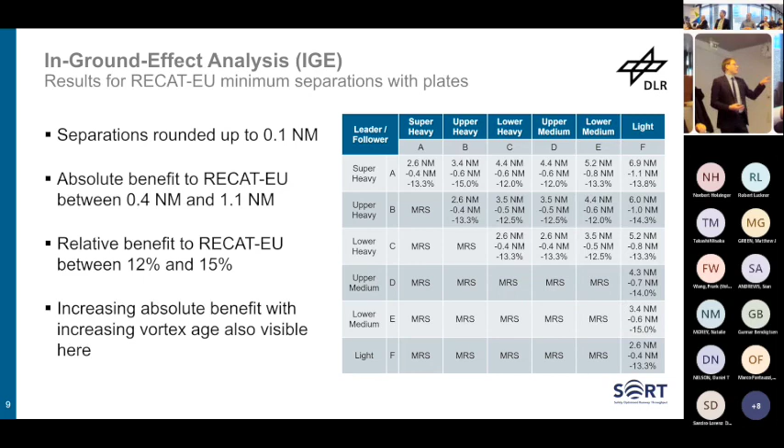So we have the highest precision that we can achieve in our calculations stored. Just for the presentation slides, we decided to round them to 0.1 nautical miles, so we can give somewhat precise values without overflooding the slides with too many digits. But basically we decided not to round these numbers at all because we are looking at them from a scientist's point of view. For establishing a safety case, of course, rounding up to 0.5 miles could be done, but from our perspective, we want to see the precise numbers.

And if we take a look at those numbers, we can see in the top row the resulting separation for the IGE analysis only, so only in-ground effect on this slide. In the second row, we see the separation difference when using plate lines. And in the third row, also in relative values. What you can see here, the absolute benefit starts at about 0.4 nautical miles and goes upwards to 1.1 nautical miles, and there's an increasing absolute benefit with increasing vortex age.

That's exactly what I've already shown on the previous slide on the time scale that transforms to the scale here as well. If we have a higher overall separation, we also gain higher benefits. But that means the relative benefit remains more or less the same, somewhere between 12 and 15% for all the different aircraft categories. MRS means minimum radar separation, but probably you're aware of that. So in some categories, we don't have any wake vortex separation, only minimum radar separations. But for all categories where wake vortex separation is relevant, we get quite substantial benefits here for the in-ground effect.

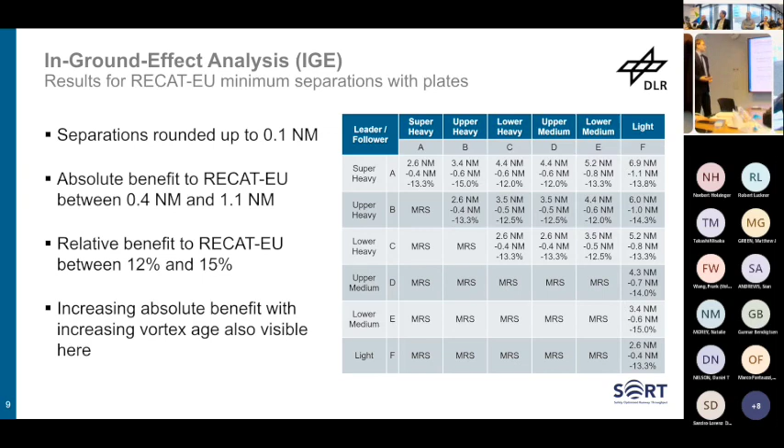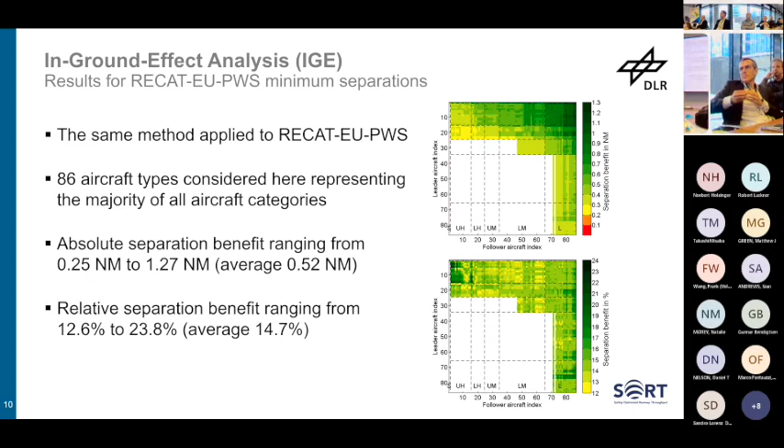So that's the in-ground effect analysis. But as I've told you already in the introduction, it's very important to keep in mind what is happening out of ground effect. When we're going further up on the glide, the plates are not effective there. So what happens if we are reducing our separations?

What we've done here is an OGE analysis without considering the effect of plate lines, because they are not effective out of ground effect, and then combined the OGE analysis without the plates with the IGE analysis with plates in a conservative way. That means we take the higher separation value of these two cases, and that's our final result that I will show on the next slide. Using this way, we can use the benefits from the plates without compromising safety further up on the glide, where the plates are not effective.

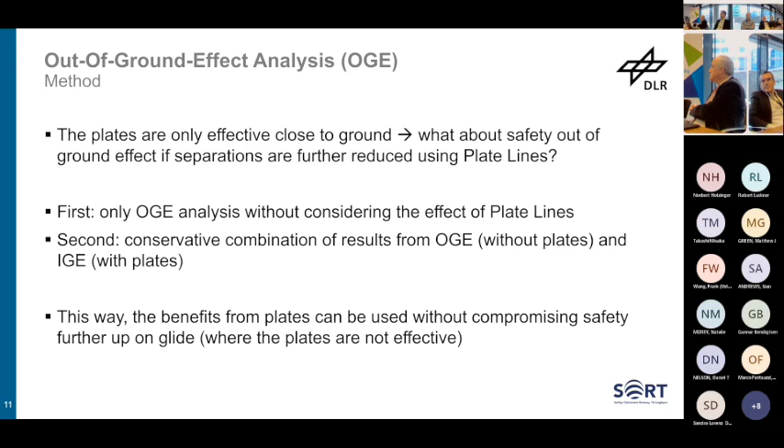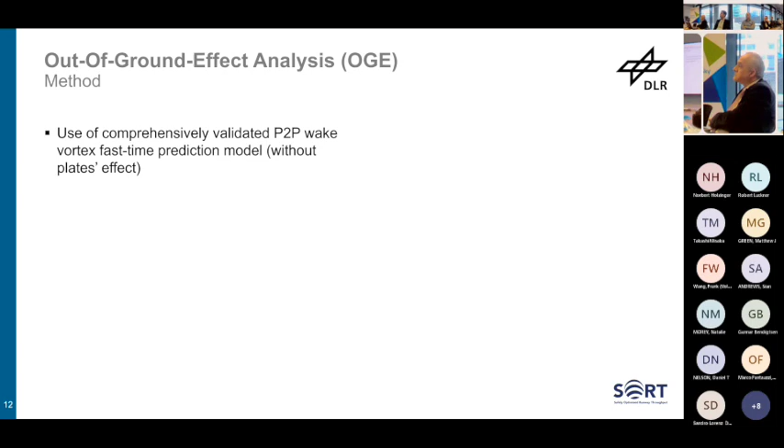So what have we done here for the OGE analysis? We use the comprehensively validated P2P wake vortex fast time prediction model without the plates effect, because we are out of ground effect now. Frank can definitely tell much more about this model because he has developed it.

Also, we use the rolling moment coefficient, the RMC, as our safety metric. We use the same definition as provided in the RECAT EU pairwise safety case, so we are trying to be comparable with the safety case. And we use the RECAT EU pairwise minimum separation for each aircraft type here as our reference, at a true airspeed of 160 knots, as is also given in the RECAT EU pairwise safety case.

I want to show you an example. I've chosen the Learjet 35 here as the example follower aircraft. It's a relatively small aircraft, which means we have a defined separation for all of our leader aircraft types. If I would use a bigger aircraft as the example, then we would only have separations for larger aircraft and minimum radar separation in any other case. That's why I've chosen a small aircraft here.

We see the separation start at about 7 nautical miles for the Airbus A380 in front, and then it goes downwards to 2.5 nautical miles for smaller aircraft. On the right-hand side, we have some small propeller aircraft that we also considered. I guess the one furthest right is a Piper 34, if I remember correctly. That was the smallest aircraft we considered here. So that's basically the RECAT EU pairwise separation for every different aircraft type.

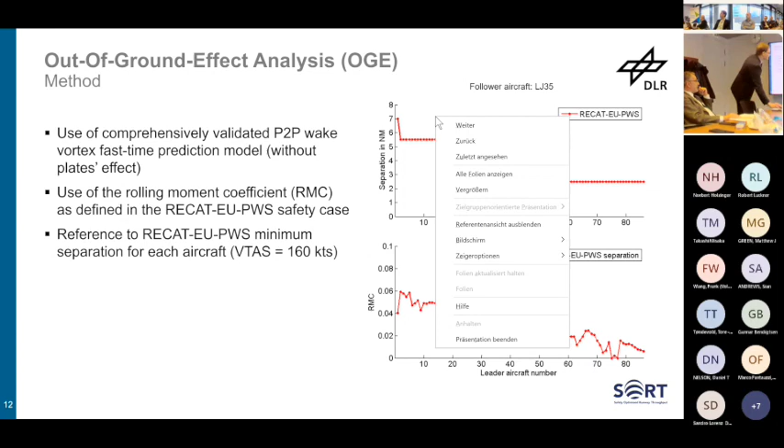What we've done here is calculate the RMC values for all the different aircraft pairings. We actually see that for the A380, it's not the highest RMC, because in that case the separation is much higher, so we are at a higher vortex age, meaning we actually have a lower RMC value. The highest RMC value for this aircraft pairing using these models was actually for the Boeing 739, because that's the largest aircraft where we still only have a separation of 3 nautical miles. So that was the worst case leader aircraft, if you want to call it that way. We did this investigation for all different aircraft pairings.

We identified the worst case leader aircraft, the one that induces the highest RMC at the RECAT-EU pairwise separation, and we consider this RMC value to be an RMC limit for the particular follower aircraft. What we can do next is align all the RMC values to this limit, giving us potential separation benefit in the RECAT-EU pairwise separation. If we reduce separation slightly, we can move the RMC upward toward this limit without exceeding it. For this example case, we get the following values.

If we have larger leader aircraft, we can reduce the separation slightly and reach this RMC limit. For small leader aircraft, this theoretical calculation shows we can go down to a separation of zero and still not exceed the RMC limit, because a small propeller-driven aircraft in front produces this result. We don't need any wake vortex separation here, but these cases aren't important in our use case. We're more interested in larger, heavier leader aircraft with small aircraft behind, and we can align them on this RMC limit.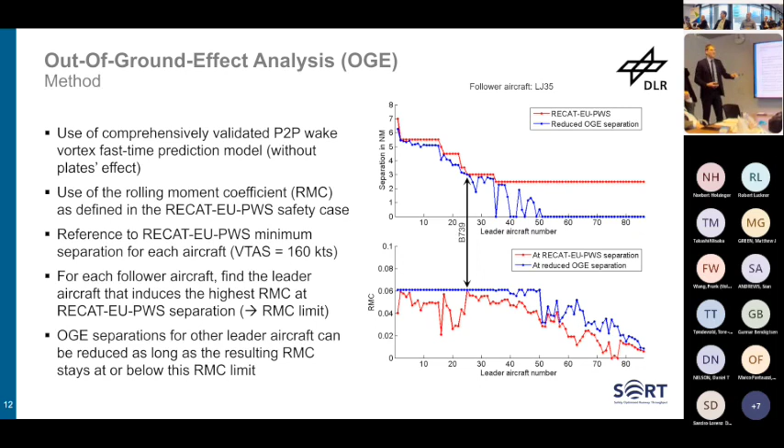In the end, we'll combine this OGE analysis with the IGE analysis to see the finally resulting separation. But just to give an example, there's some potential benefit here for the OGE separation. This benefit is already available without needing any plate lines at all. We could theoretically reduce our OGE separations for many aircraft pairings without exceeding the RMC limit defined by the worst case leader aircraft.

But normally, for most aircraft pairings, the in-ground effect case dimensions the separation in the end, so we cannot use this potential even though it's already there and we don't need plate lines for the OGE case. If we can get some benefits in the IGE case, we enable using some of this potential. But in the end, we won't align all aircraft types to this RMC limit, because in most cases the IGE effect still dimensions the final separation. We can at least use some of this benefit without compromising OGE safety. That's the basic idea.

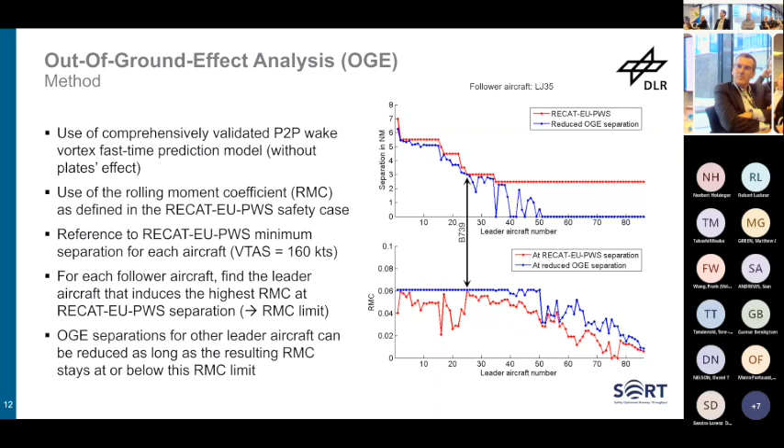If we combine the IGE and OGE cases, we get these results. First I show it for the RECAT-EU safety case as a reference, rounded to 0.1 nautical miles to avoid too many numbers.

For super heavy, which is only the A380, we don't see much effect here because the A380 is actually the worst case leader aircraft for many follower aircraft types. In some cases other leader aircraft were the worst case, so we have slight improvements for the A380, but not too much. The benefit is also a bit lower because when we sum aircraft into categories, the worst case aircraft in each category defines the separation for the entire category, eating up a lot of the benefit.

We get somewhat smaller numbers, but the absolute benefit is still between 0 and 0.7 nautical miles in the best case, for small aircraft behind upper medium. The relative benefit is between 0 and 14%. Looking only at heavy behind heavy or medium behind heavy, which is the most relevant combination at many international airports, we have an average benefit of at least 7.5%. But we can further improve it using RECAT-EU pairwise as a reference, which I'll show on the next slide.

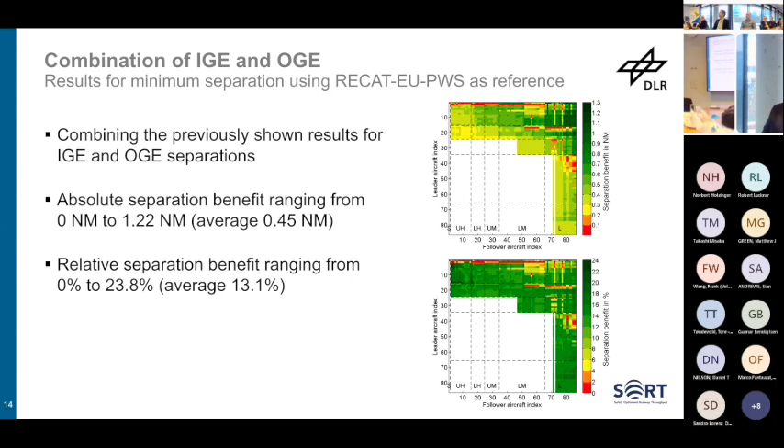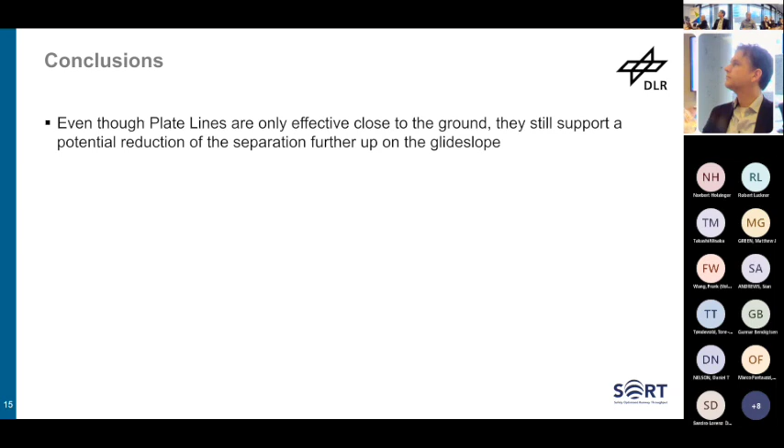Okay, so with that, I want to come to the conclusions. We have seen that even though plate lines are only effective close to the ground, they still support a potential reduction of the separation further up on the glide slope. We consider it a reduction potential that is already there outside of ground effect, which normally cannot be used because of the in-ground effect cases. But using the plate lines, we can reduce the separation in-ground effect and then also use that out-of-ground effect without compromising safety.

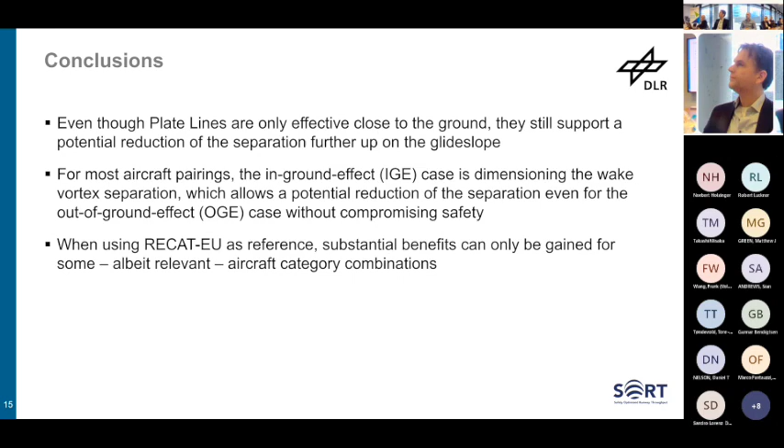When using RECAT-EU as a reference, we can gain substantial benefits only for a few aircraft category combinations, but these are the most relevant, so that is already some benefit. Especially when using RECAT-EU pairwise as a reference, we see that for most aircraft pairings we can get about half a mile separation reduction, and that's quite a substantial benefit.

As a final remark, I want to address the topic of wake vortex transport. That's also very important and has to be kept in mind. We didn't consider it in these calculations here, but especially out of ground effect, it's a very relevant mechanism for establishing a safety case that definitely needs to be considered further, but maybe we'll talk about that in the discussion later on.

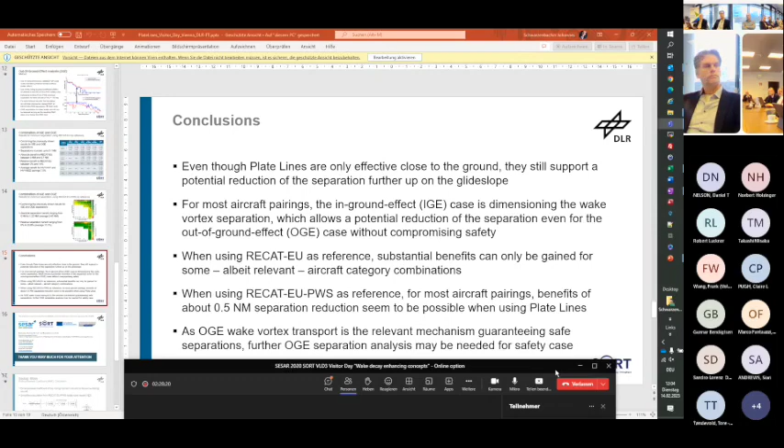I would like to add a thought to the second thing you mentioned, Frederick. For RECAT, you rounded up from 0.1 nautical miles, which was your technical accuracy, to 0.5 for good reasons. And if we would do that now on top, we would have twice such a conservative buffer. I think if we should do that, we should start with your fine granularity, do our own fine granular computation, and then round up, in order not to add safety buffers twice that add up. So that's a way one could deal with that.

That makes sense. Now the thing is, at the end, it's about discriminating between different aircraft types' behavior near the ground or even out of ground, because there is the influence of some factors which are different between aircraft types, like the vortex spacing. We tend to make some assumptions in some cases, but even out of ground effect, maybe having the same vortex spacing value as an assumption is not that fully realistic. So that's things that could be looked at as well. And indeed, at the end, depending on the assurance level that we have, we could go to maybe some rounding.

In your presentation, you had a delta T star analyzed, but I didn't get, was it the maximum between the two curves that occurs, or is there a particular process to get to this delta T star at a certain level, that was not fully clear for me? No, sorry, not both at the same time.

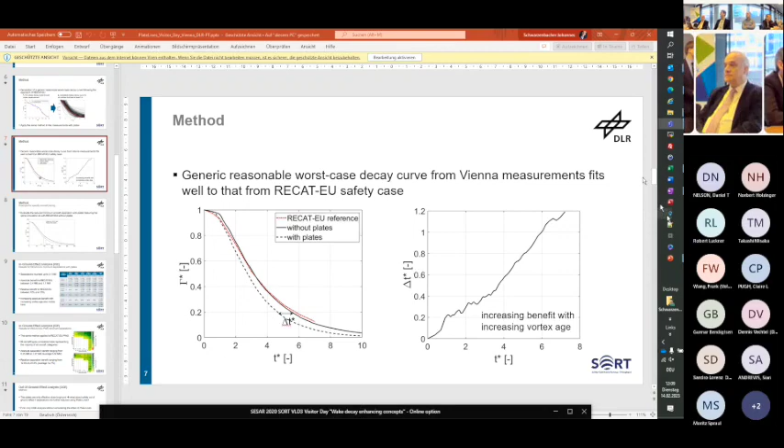Okay, thank you. Other questions from the audience?

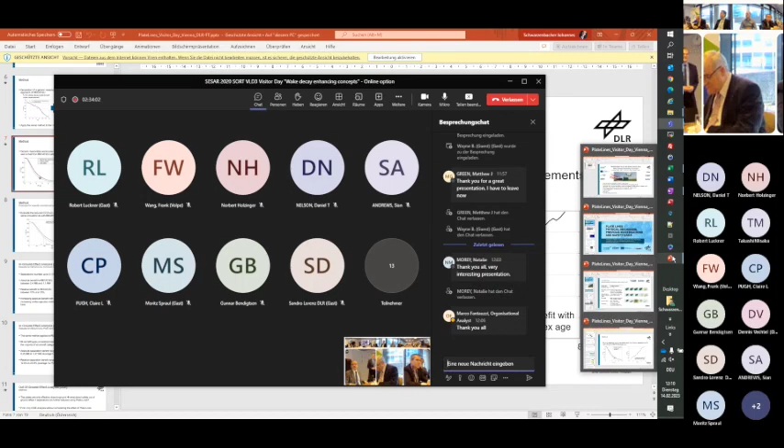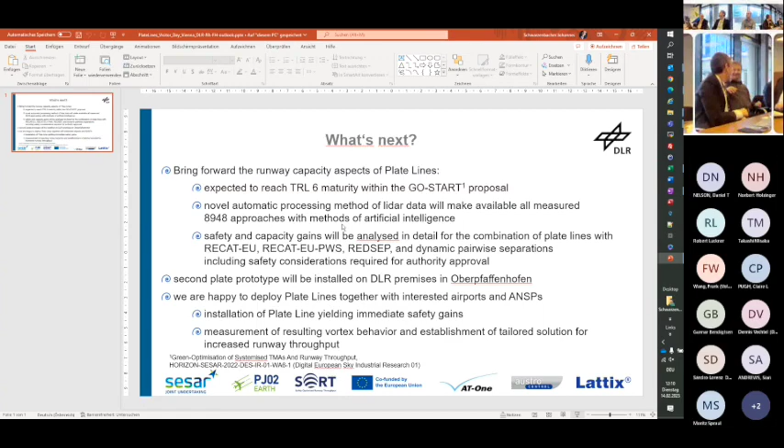I think we are not really tied to our schedule, so if there are more questions from the audience, I think we have time to answer them. We're going to lunch, but they are not waiting for us. Yeah, but I wanted to prepare what's next.

We want to bring forward the runway capacity aspects of plate lines. This has been mentioned before, and we currently have in SESAR 3 a proposal termed Go Start, organized by NATS. Go Start stands for Green Optimization of Systemized TMAs and Runway Throughput. Possibly today it will be decided whether this proposal was successful or not. Maybe it will be delayed, I heard rumors, it's not clear. I checked my email, the message is not yet there. No breaking news. But there we want to reach a technology readiness level 6 with respect to runway capacity gains.

There are two major steps. First, we want to make available all measurements from Vienna, a substantially larger amount of data, almost 9,000 approaches, 25,000 vortex evolutions, by processing them with methods of artificial intelligence. We have very promising progress made with that in our group, led by Anton, a PhD student, with master students. With that data, we want to make a more profound analysis for our different use cases, and maybe already include safety considerations that would be required for approval.